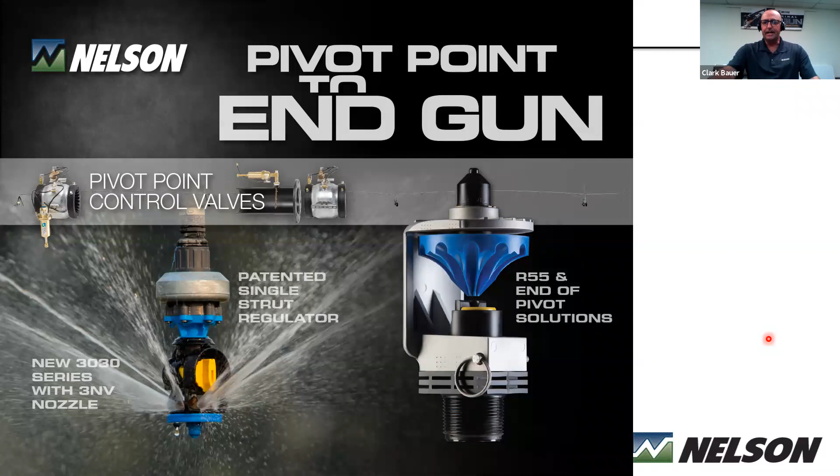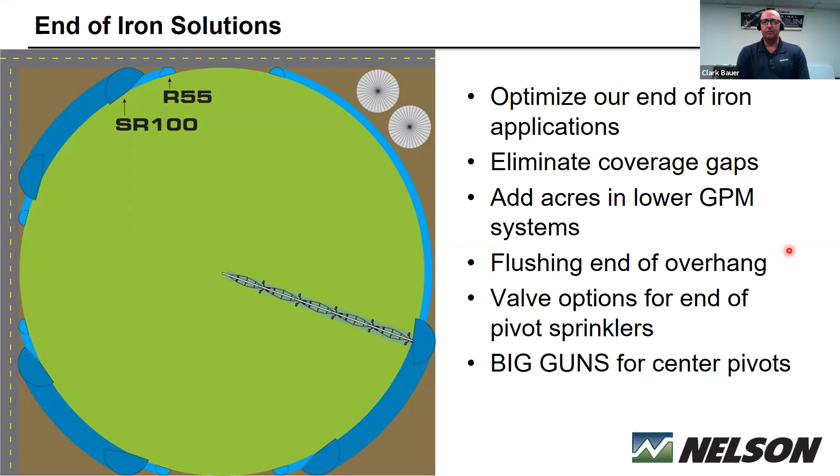We'll cover some flushing products at the end of your overhang, and then we'll review some valve options for individual control of those end of pivot sprinklers. Then we will conclude by covering our big gun product line for center pivots. So that being said, we'll get started here.

Where did end of pivot products start for us? It started with our part circle rotator. And that's widely used across a lot of my territory, a lot of use in south central Nebraska, for instance. But we'll keep expanding on this product line as well. So along that line, we have a new product that we're bringing out. This is a limited release for test only.

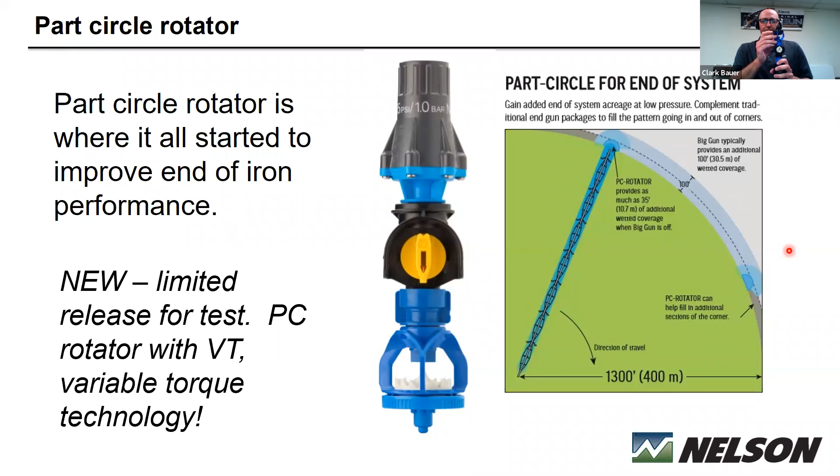It is our part circle rotator with new VT technology, variable torque technology, and I will expand more on that product as we get into the R55s. But what this will allow us to do is eliminate the different colored pads for different size nozzles. So you only have one pad. You'll have a pad for upright mounted, which is new, and then you'll have a pad for down mounted.

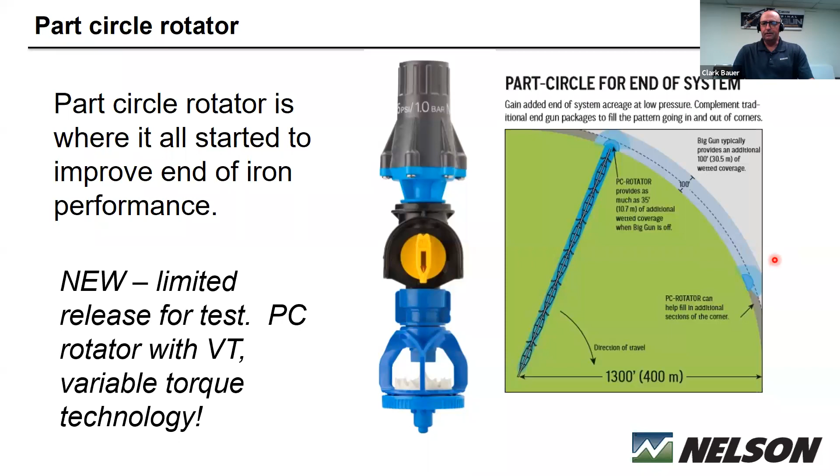So we'll start talking about the R55 as an end of pivot solution. And again, we will talk about coverage gaps. You can pick up extra acres by irrigating where the SR100 can't as the pivot enters or exits the corner, and around obstacles such as roads or buildings over here where we don't want to hit those grain bins with our big gun, but we can still add approximately 50 feet of throw.

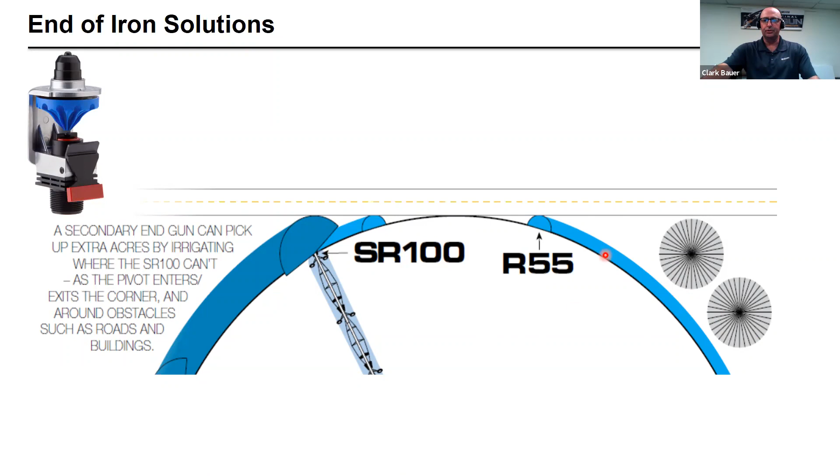So again, we want to maximize those acres out at the edge of the field. Do the best job possible and add bushels and performance to our operation. So let's get into the R55 and the R75 products. Both very popular and widely used across many of the markets that I serve.

So the new R55 VT, and again, there's the VT, our variable torque motor, and we'll elaborate about that slightly. A variable torque motor on an R55 can operate at 15 to 60 psi. We have our snap fit nozzle system, which I'll show some more detail on later. We have new nozzles again. We have a new green plate for downward, or R55 inverted, R55i.

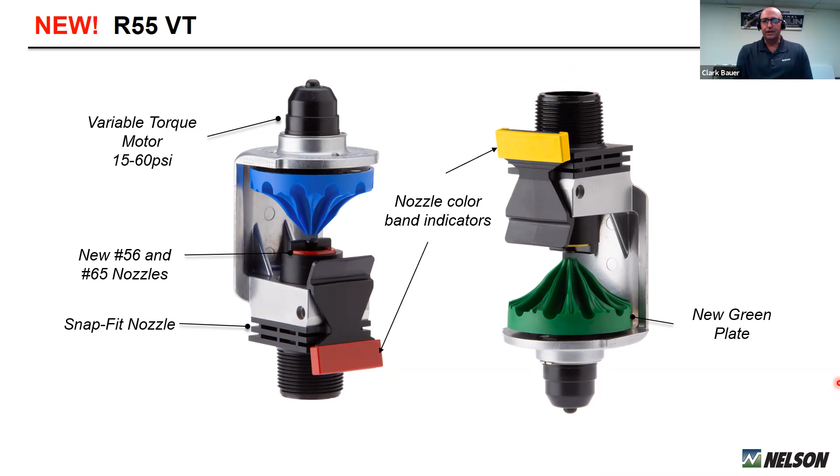And a good way to think about that for knowing which product you want to install: blue pad goes to the sky and the green pad goes to the ground, or the green corn, or the green grass. So that's a way to remember what orientation you should mount those at. And again, the snap fit nozzle has color band indicators, so you don't have to take 2 trips up a ladder if you want to change a nozzle to change your performance.

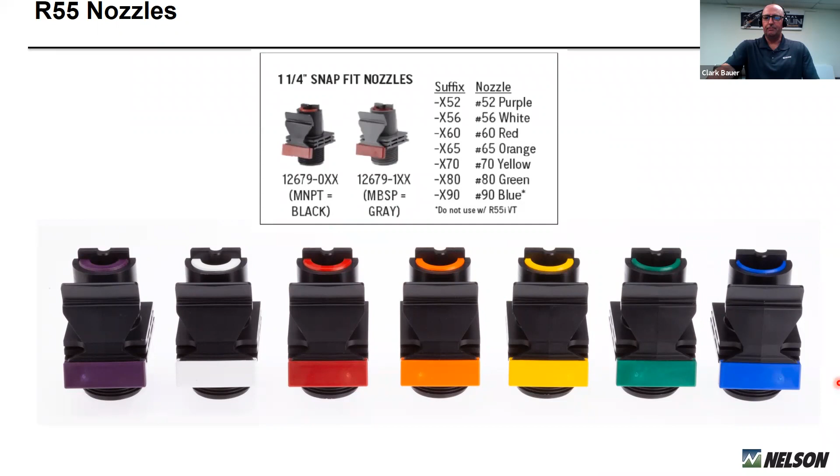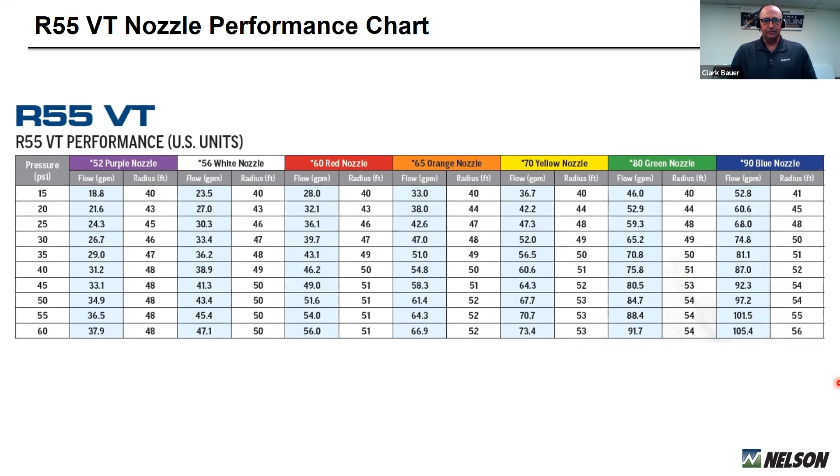Very convenient. And again, here is the range of the snap fit nozzle systems, 52 all the way to 90. The blue 90 is the largest, and the snap fit nozzles work really well. So here's the performance chart on the R55 VT. This would be the blue, and 15 to 60 and 18 gallons, 40 feet of throw, and 105 gallons for 56 feet of throw. That's your range of operation. So a very big range of operation with this product, and it's become very popular.

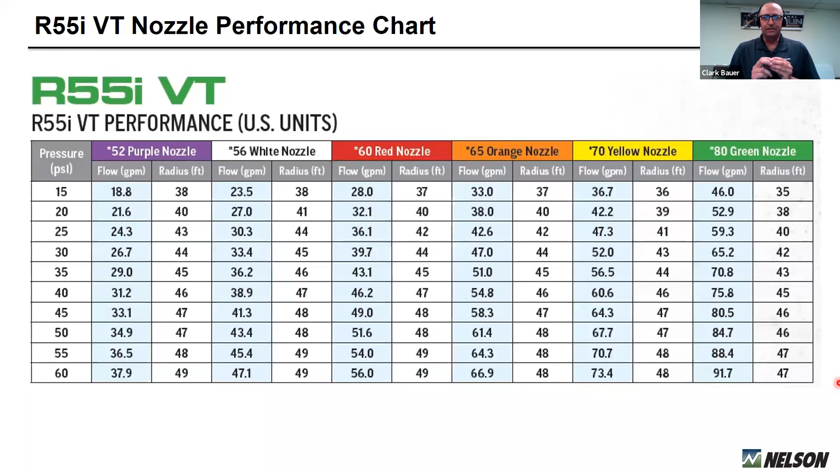The R55i VT, again, variable torque motor there as well. So with that variable torque motor, I'll elaborate a little bit more. We're talking about ranges of 15 PSI to 60, 18 gallons to 91 gallons on the R55i. Variable torque means that no matter what the pressure is, or no matter what the nozzle size is, the variable torque will allow that pad to spin at the same RPM. So that's the key part of the variable torque. Forgot to mention that earlier, but covered it there.

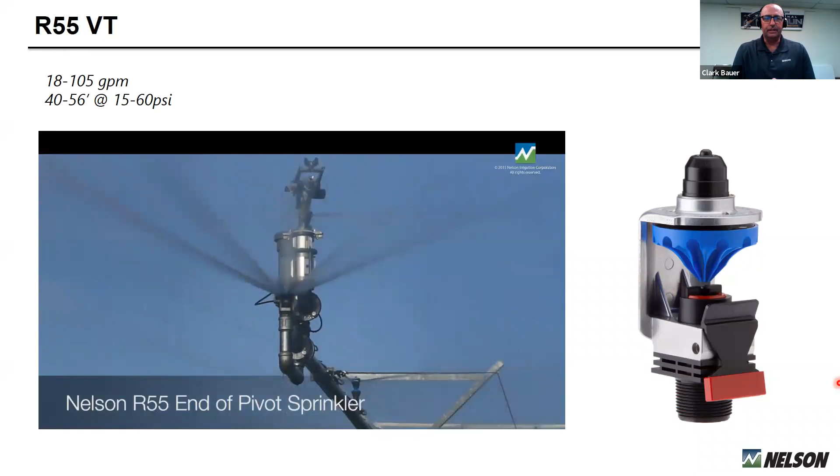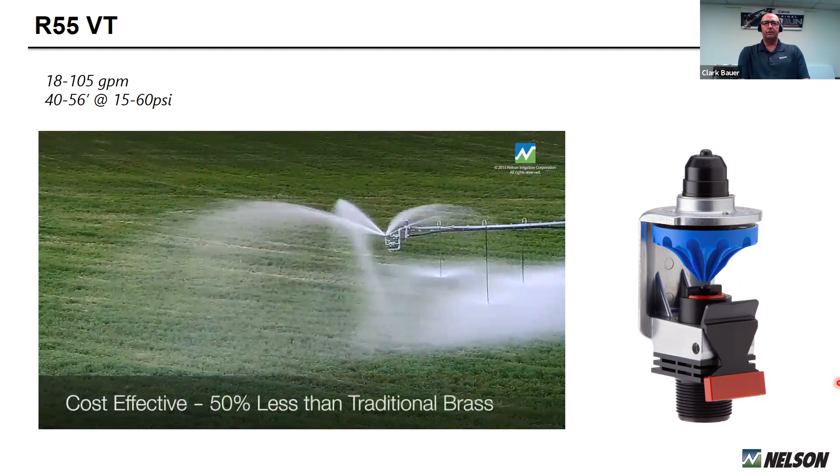So here is some video of the R55 in action. I'll just let this run. As you can see, the streams getting a good application rate thrown out. Here's a little bit different view, and very good looking application right there. And I think we'll see it in combination with an SR100 here toward the end of this video. Yeah, there it is in combination with the SR100. So a good looking package right there.

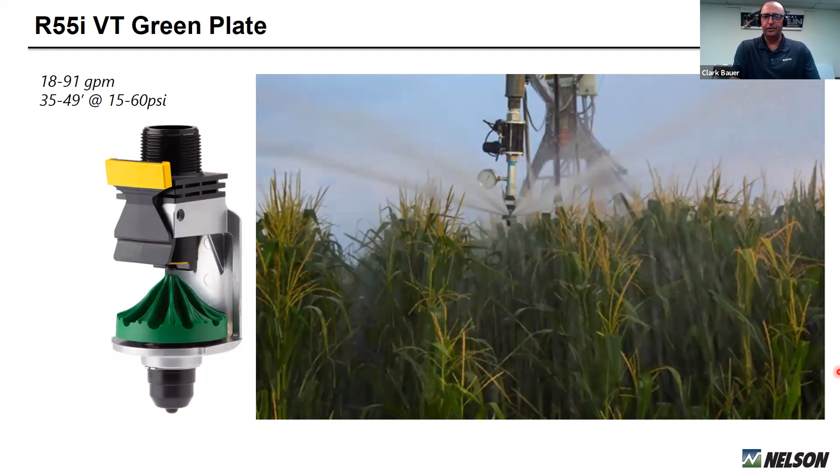And the R55 VT is a good looking package right there. There's another view on that video. So here's the R55i, the green pad, downward mounted. I'm just showing you a picture of its operation here. No video, just a picture. And here's a couple more pictures of the R55i.

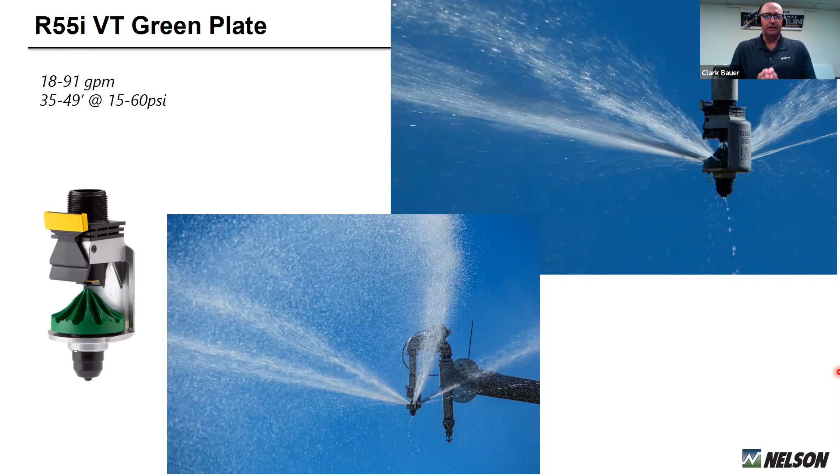And again, 15 to 60 PSI. I will mention too, on the performance chart for the i, the 90, the blue nozzle is not available in this product line. It basically kind of floods the pad and won't allow it to turn. So therefore you only have 90 gallons as a top end on this R55i.

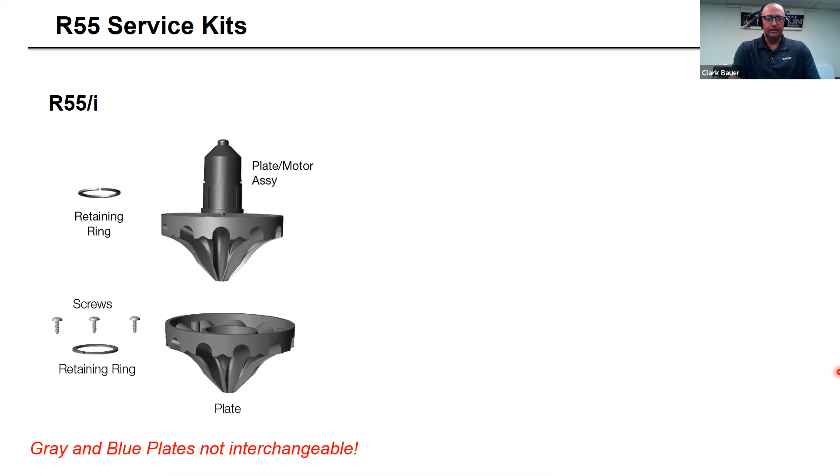So we have service kits. This would be the older kits for the gray and the blue pads. They're not interchangeable. And then same thing with the blue and the green today. They're not interchangeable. So if you're changing a motor out that's green, you have to put a green pad back on it. So I'll show you real quick how to do that. I've already removed the snap ring. I'll remove the snap fit nozzle real quick, very easy to do. And then with the snap ring out, we just pull that pad out.

And you can see here, there's some screws that you need to remove and you can put on your new pad. The kit comes with a new snap ring and new screws, and you simply use a little Allen wrench to deal with those screws.

So why would I want to change my pad? This is a very robust pad, it's going to last a lot of years. But in some applications where we're dealing with sand, surface water with some sand grit in it, or maybe pumping a little bit of gravel, after several years the edge on that pad may get very dull and it will not perform at its desired point. So it's very easy to change a pad, very inexpensive, and you don't have to remove the entire gun. Very convenient.

And again, as I mentioned, they are not interchangeable. So if you've got a green, or if you've got a blue, you've got to go with a blue pad. The motors are designed that way.

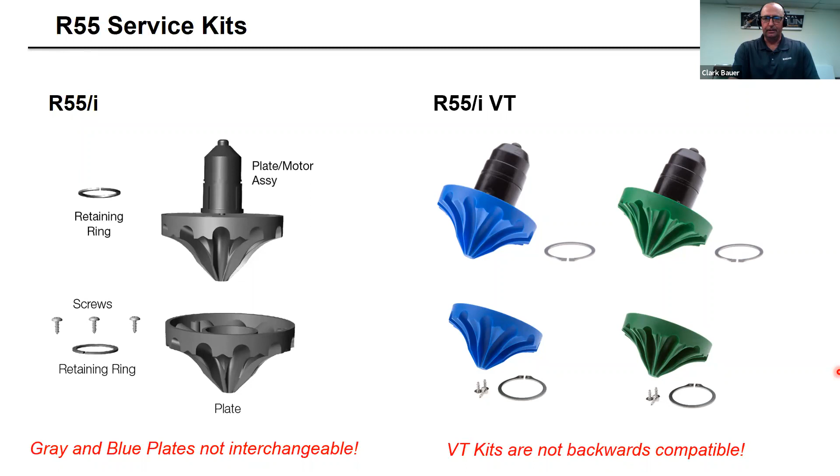So arc settings are set by the nozzle, and they are set on the blue and what would be the i gray, which is now green. Same performance: 108 left to 100 right on the blue, 109 left and 118 right on the gray or the green.

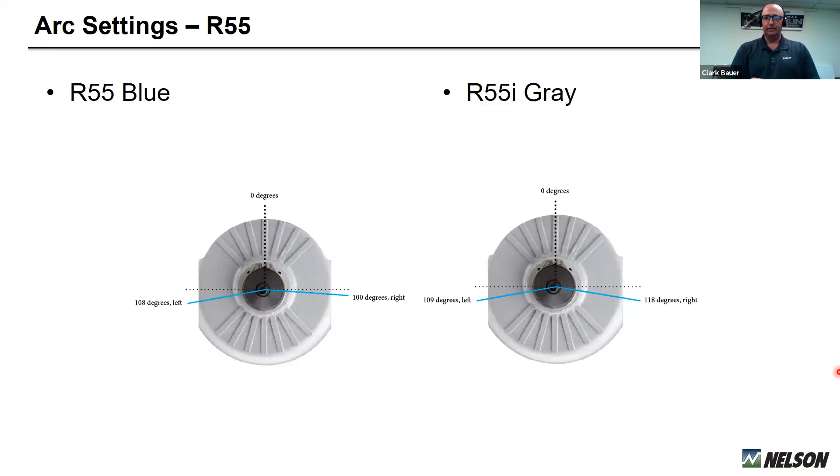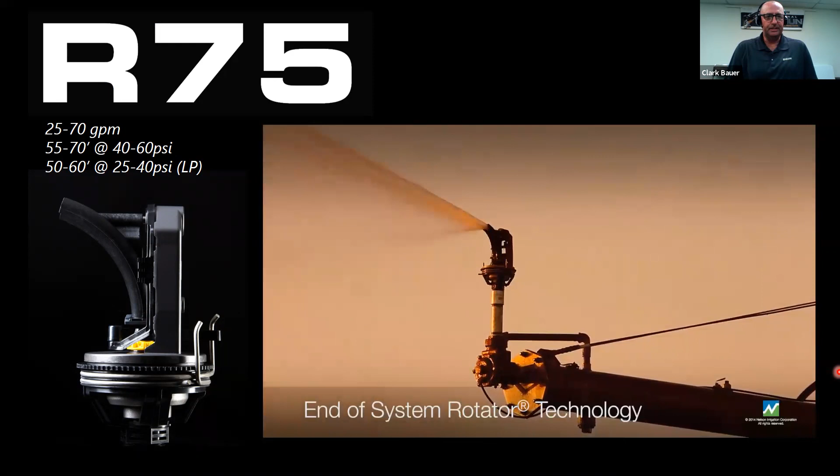So talking about the R75, showing a video here. The range is 25 to 70 gallons per minute and 55 to 70 feet, at 40 to 60 PSI, 50 to 60 at 25 to 40 LP.

So there's two guns in this variety: LP, which has less rotator motors in the base, as opposed to the standard R75.

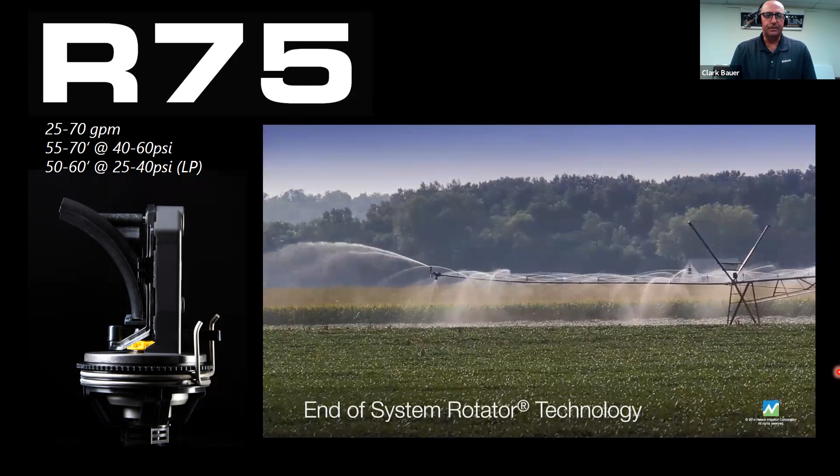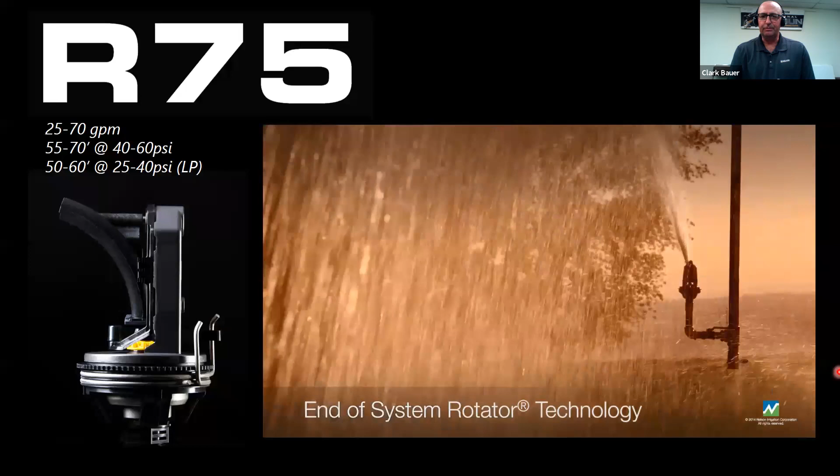Again, rotator technology makes this product line work. You'll see there's an infill tube there, and when it reverses back, it's going to have a distance tube shot - there you go, right there to the distance shot. So it allows you to get the maximum distance, but then it will infill as well. Very good product line here.

So with that, as we change plates on the R55, we can also change nozzles here if the same issue happens over several years while you're pumping maybe some grit or some sand. But you can easily take this out, change your nozzle if needed, and then replace this back together. Very easy just to clip it on, clip it off, easy to work with, and very convenient if you do need to change those nozzles out.

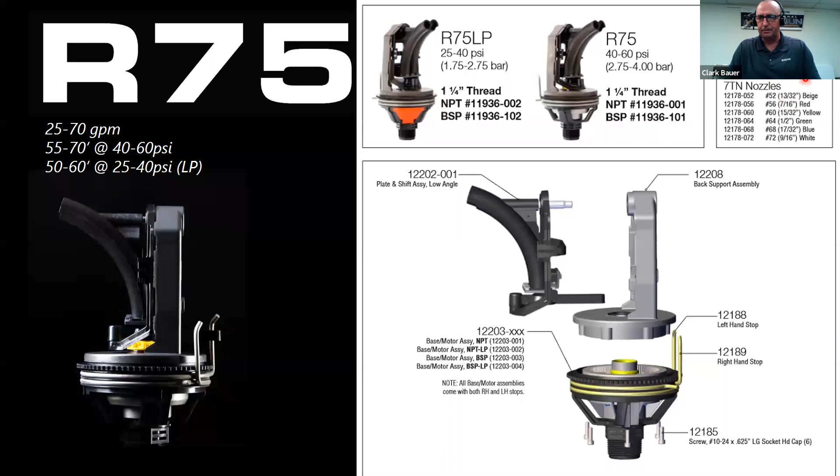And here is the nozzle sizes up here. There are 6 different nozzle sizes available in this product line. Again, dual barrel spray plate, as we saw in the video, adjustable stops which is important to customize your arc, and easy access nozzle, as we've also displayed.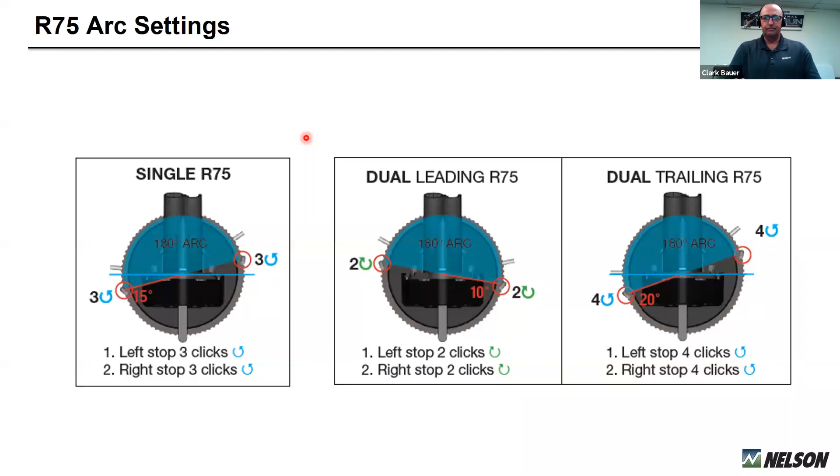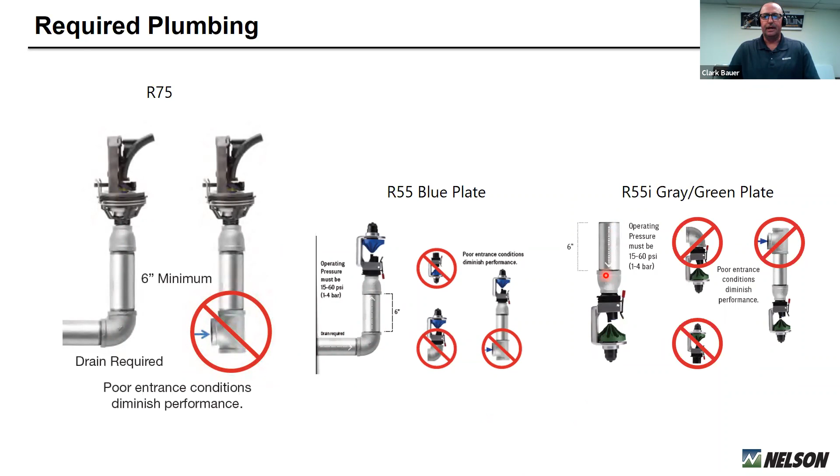Required plumbing. This is important for the performance. I've seen an R55 with a T below it before, and it does hinder the performance. We want sweeping elbows and 6 inches. So sweeping elbows and 6 inches, and of course on the i, 6 inches straight down to optimize those performance points.

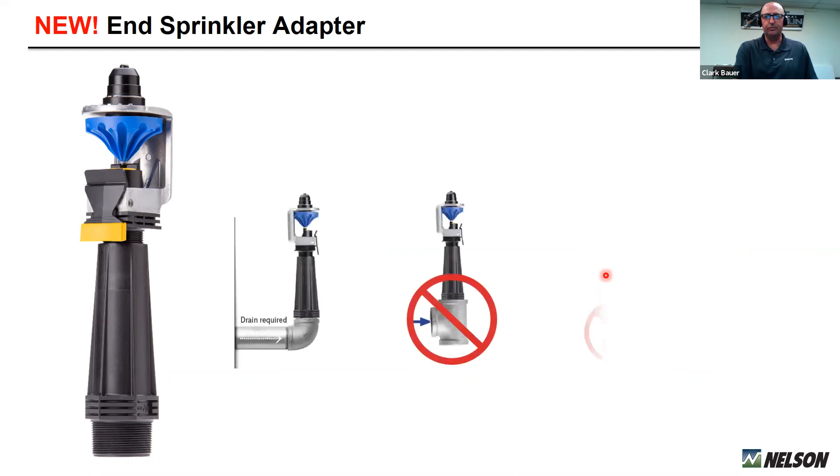We have added a new sprinkler adapter to answer that 6-inch distance. This is available from Nelson, and I have one right here. But again, it's very convenient. It's 2 inches on the bottom, 1.25 inches on the top, so it will fit both the R55 and the R75.

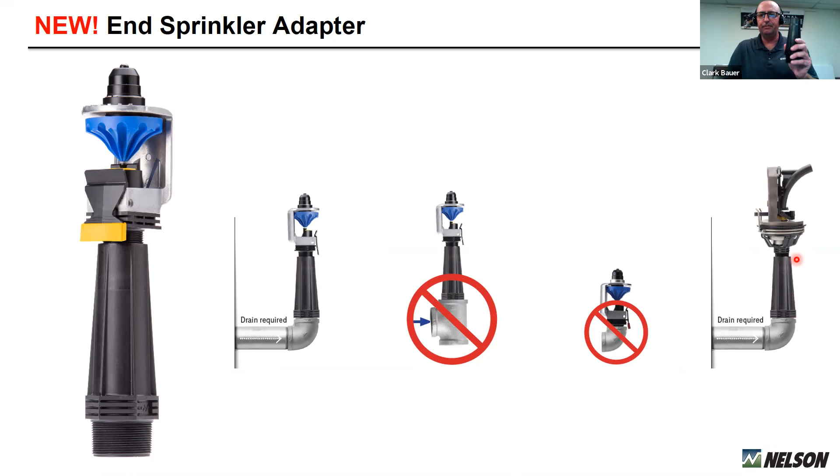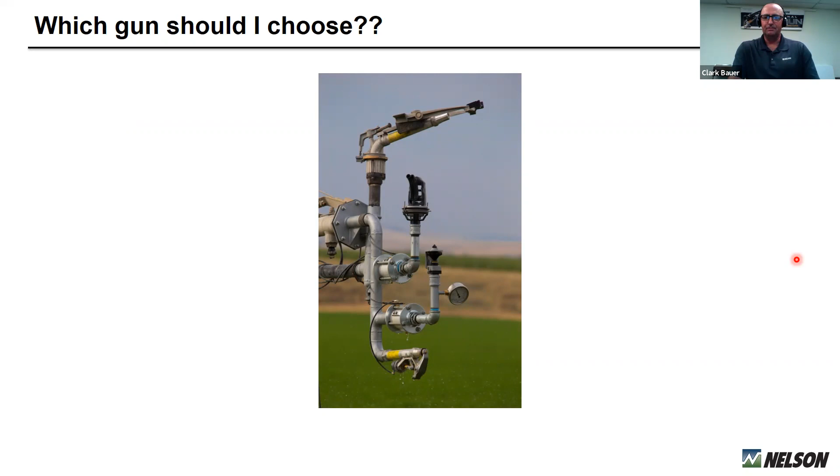So that brings us to the conclusion - not the conclusion of my presentation, but which gun do I use? That's what you're going to have to formulate and decide for your operation and what you're maybe going to be selling at your dealership. Well, we would encourage every pivot to have all these guns, but that's probably not practical in a lot of applications.

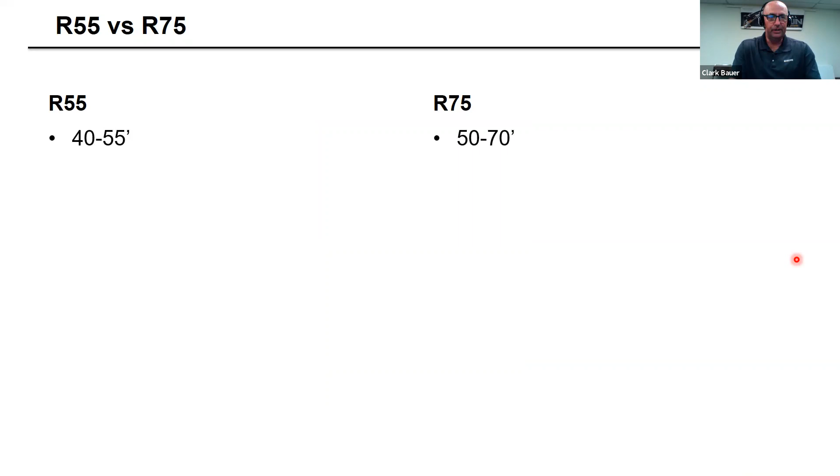So let's look at the R55 versus R75. 40 to 55 on the R55, 50 to 70 on the R75, 15 to 60, and then of course the 2 different pressures for the R75. This is a little higher application rate for longer systems or high flow, and this is also a little bit lower application rate, maybe shorter systems or lower flow systems. Excellent single, and then some dual options may improve your uniformity with the R75.

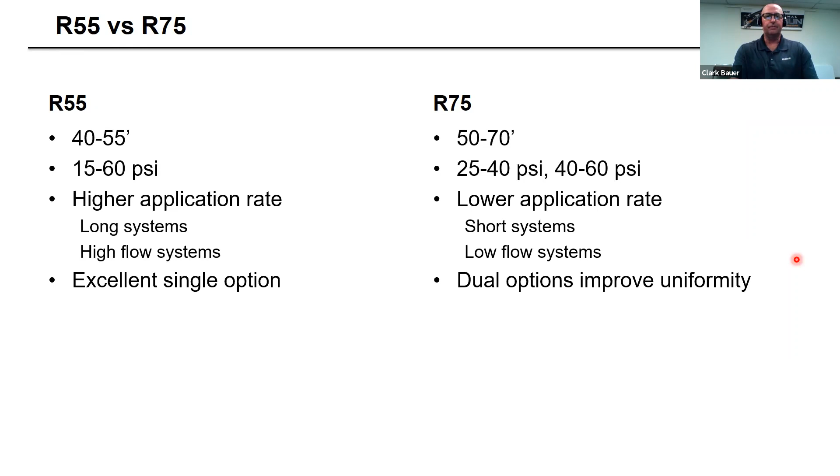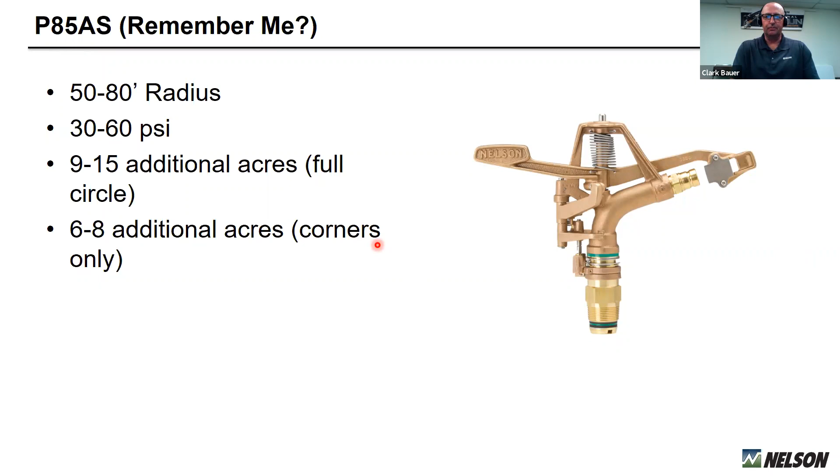This is kind of the 'remember me' point. We still make our P85 impact, you get a little bit further throw, 50 to 80 down to 30 PSI to 60. Again, maximize those acres and do the best you can do, get all those acres covered. So again, still making the P85 still available.

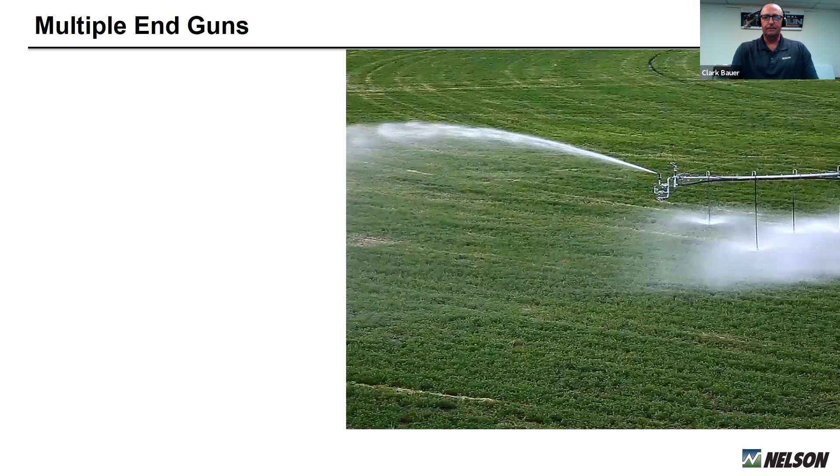So let's talk about multiple guns and then maybe the control valves and get into that. Just going to show some videos. This would be the R75, and this would be the distance tube, I believe. And then in combination with the end gun coming on, there's a lot going on out there. There's the infill tube spray that's filling in the pattern, and then it will switch to the distance tube here at the end. Yep, right there. So just showing a video of that combination of different guns available.

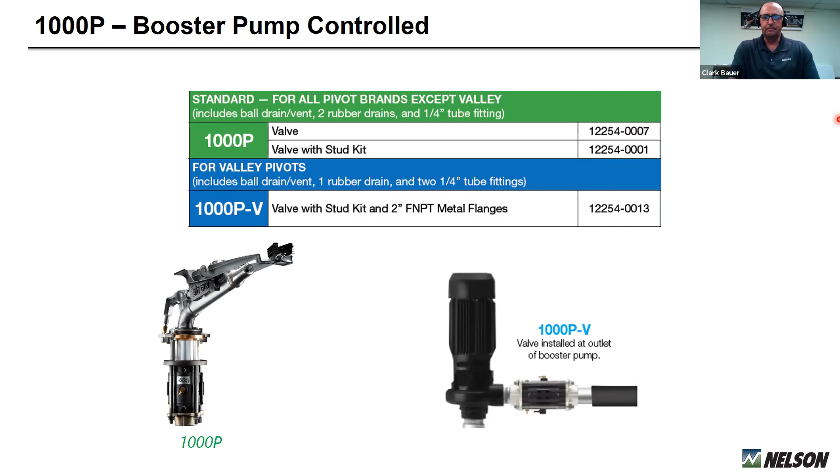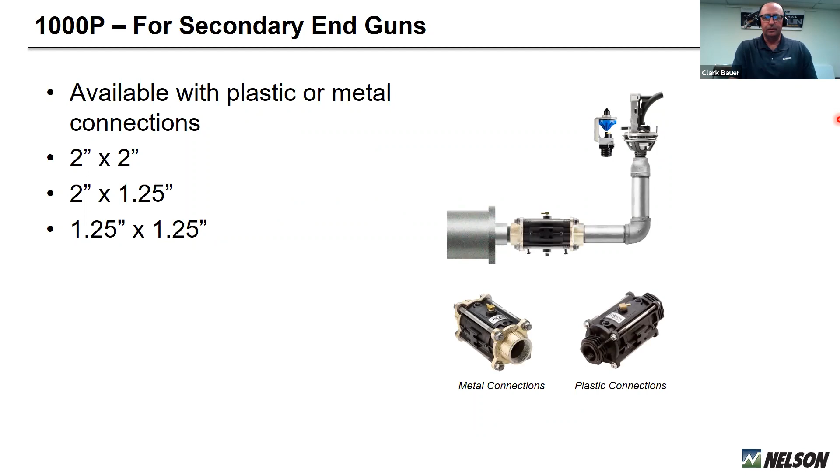Booster pump controlled valves, the 1000P valve is available in combination with the big gun in a lot of markets. So wanted to mention that 1000P valve for big guns right here. And then the 1000P for secondary end guns, available with plastic or metal connections, again for both the R55 and the R75, and different sizes available as well in those applications for those valves.

Our secondary end gun product offering here, with the pressure regulating option with the VT. With the R55 VT may not be needed, as that pattern will stay at the same performance no matter of pressure or nozzle size. So the middle one, the 1000PX, would be the standard just on-off valve.

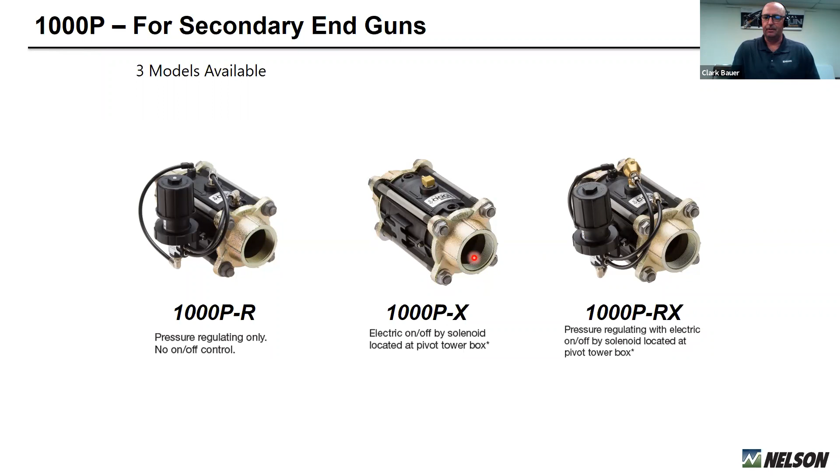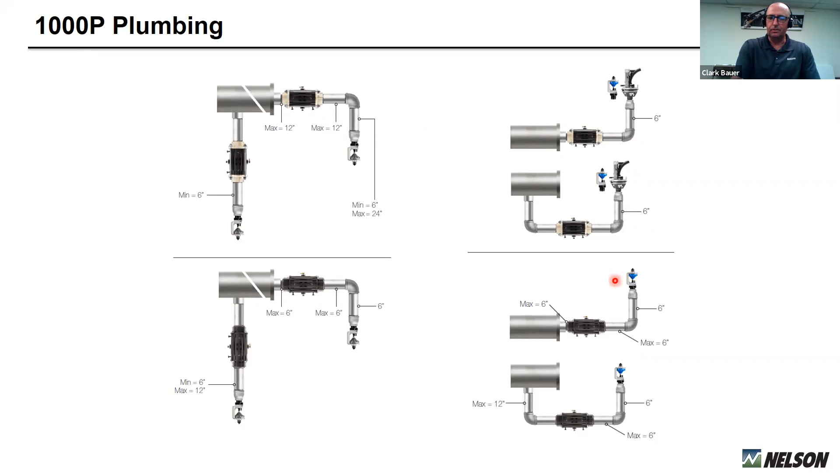So 1000P plumbing, the difference between the metal and the plastic: metal will allow 12-inch in and 12-inch out of that valve, just in this horizontal orientation. So that's the key to remember. If you go with plastic ends, we want you to stay at 6 and 6 in and out on both sides. The metal is obviously a little bit stronger, so just attention to detail there. Again, sweeping elbows down or sweeping elbows up, no T's in these locations. So pay attention to those installation suggestions as well.

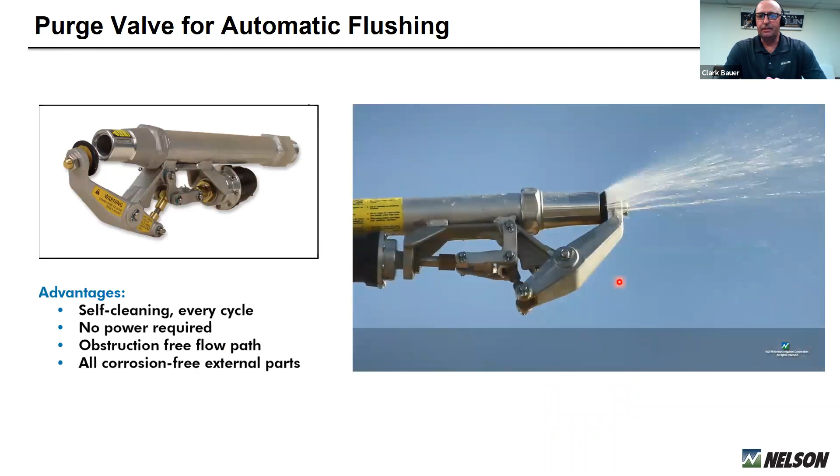Here's our purge valve. Talked about flushing options. This will stay open until it sees 8 pounds of pressure, and then when you shut your system off, it will open back up and help drain that sediment off the bottom of your overhang. There we go - it was flushing initially, came to pressure and it closed. And then when you've shut your system off at the end of the cycle, it'll open back up and flush that sediment off the bottom of the overhang.

So if you're pumping a lot of sediment, you may want to choose to do a secondary on-off and maybe turn that purge valve on one other time, or maybe two other times in that circle of operation. If you do that, we would suggest that you turn the purge valve, the flush valve, on when the end gun is off to maximize your application. Although these should be on for a very short time, just a few seconds in most cases. We just want to pay attention to the application suggestion there.

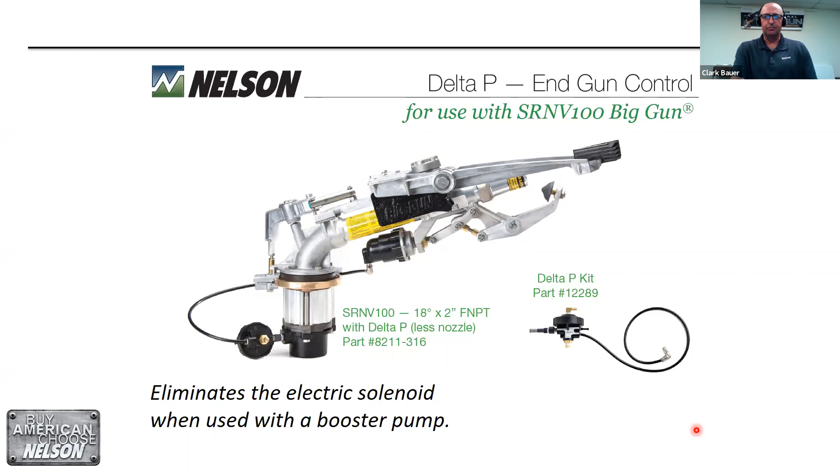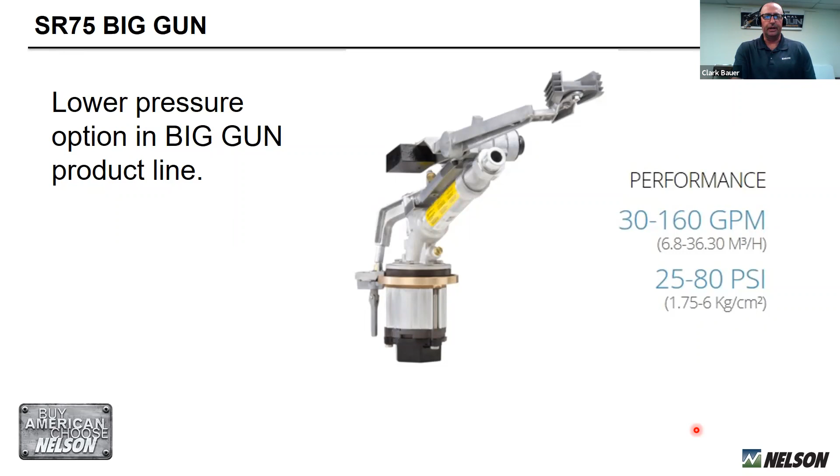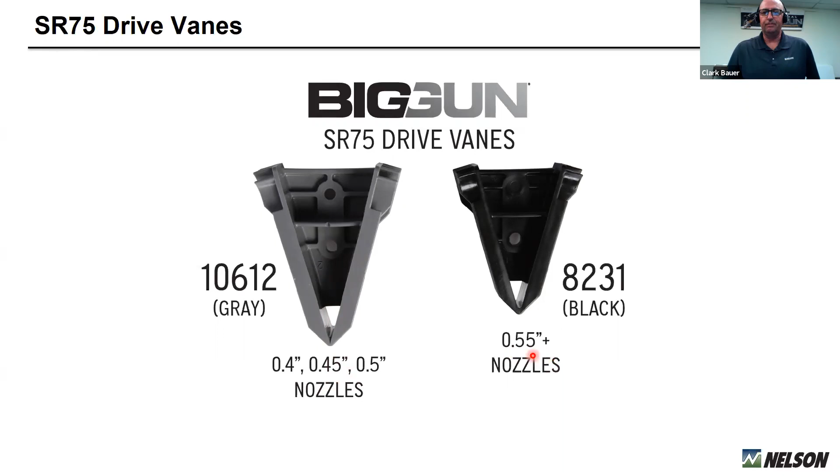So the SR75 big gun, again, lower pressure for a big gun product line. Can operate down to 25 PSI. You have to pay attention to your nozzle size at that point too, just to make sure you're not pounding the ground too bad with the stream. So just a lot of different performance levels integrating with the SR75. Pay attention to your different nozzle sizes, as they will have different drive vanes available. So your smaller nozzle will have a bigger drive vane, and 0.55 nozzle on the up will have our standard black vane, but pay attention to that on the installation.

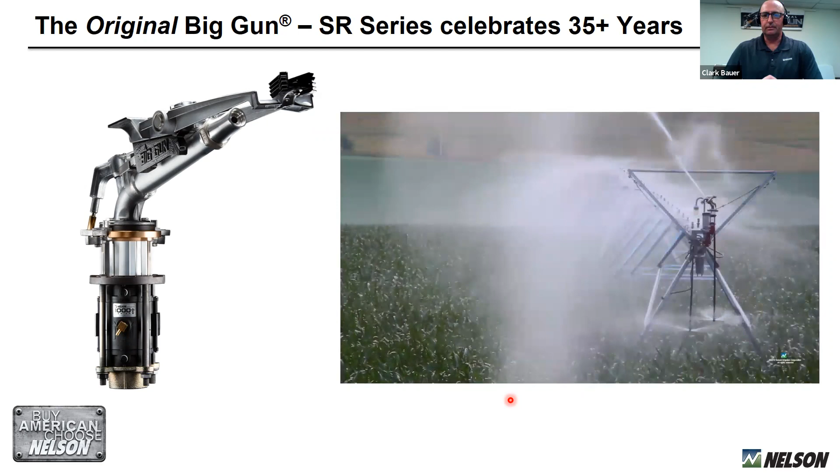So the original big gun, this is a biggie in the market across a lot of around the globe.

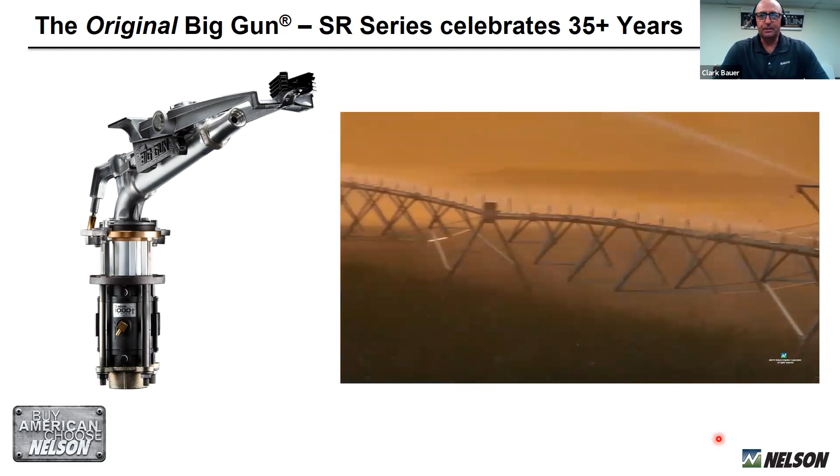Just showing some videos in operation, very robust, celebrating 35 plus years, and really have not changed the design much on that gun at all. A lot of hours and a lot of operating time proven well out there in the market, and we're very proud to have that on our product line.